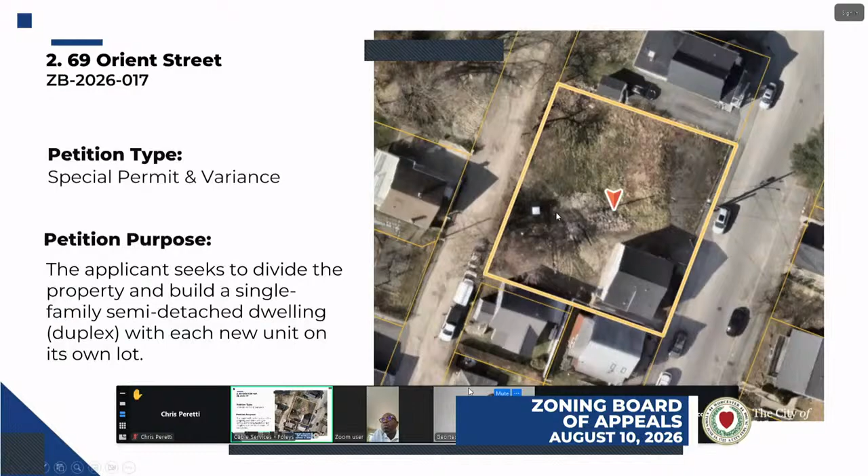Our petition asked for 3 pieces of relief for 69 Orient Street. The first was a variance for frontage, the second was a variance for area, and third, a special permit with regard to modification of the driveway and parking. I was advised by planning that there were 2 requests for waiver that we should also make orally regarding the lot percentage and the distance to adjacent buildings.

At this point, as you can see from the plans that we filed, right now there is a 1-2-family home that sits on the extreme left side of the lot if you look at it from Orient Street. The hope is that we will get relief to allow a division of this 11,000 square foot lot, which right now has 110 feet of frontage, and divide so that the current house lot will have 50 feet of frontage and 5,000 square feet, which we would need variances for the 1,000 square feet, and also 5 feet for the frontage, and that the other portions of the lot be split into 2 lots, each of 3,000 square feet, which would allow us to build a duplex, semi-detached, single-family home.

The existing lot right now does have 11,000 square feet in the frontage. Interestingly, if the building were not on the lot right now, we would actually have sufficient frontage and square footage to put 4 units on the lot if the building weren't there. That's sort of our topographic issue with the variance, that the house is there and it's on the extreme side of the lot.

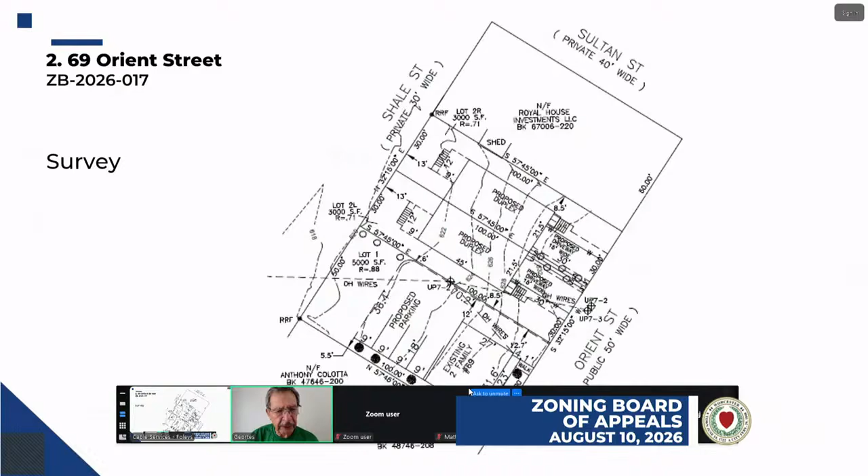Yes, I agree that this is a straightforward, good project, and the provision of housing, and actually I think it's an improvement for the neighborhood, the area, because that lot, the empty lot there, the way it is right now, is not a good look. So I do support the approval. Just a couple of questions.

Since the entrance, since you have steps, first of all let me ask, is it the intent to rent the units, or is it a plan to sell those houses, those two units, those two houses? They're going to, I think, both be sold as individual units, single-family home attachments. Did you hear that? So the intent is to build and sell?

Yes, it's a build to sell.

The reason I asked that is because looking at the steps, if there are individuals with disabilities looking to get into the house, they probably would have to use the garage to go in. If at the end of the garage there is an easy way to get into the apartments, otherwise it would not be accessible at all the way it is right now. But that would be up to the people who want to buy it, and if there are individuals with disability who wanted to buy, basically they would not have a chance. So that's just a point that I make. It's not that I have the purview to stop the project because of that.

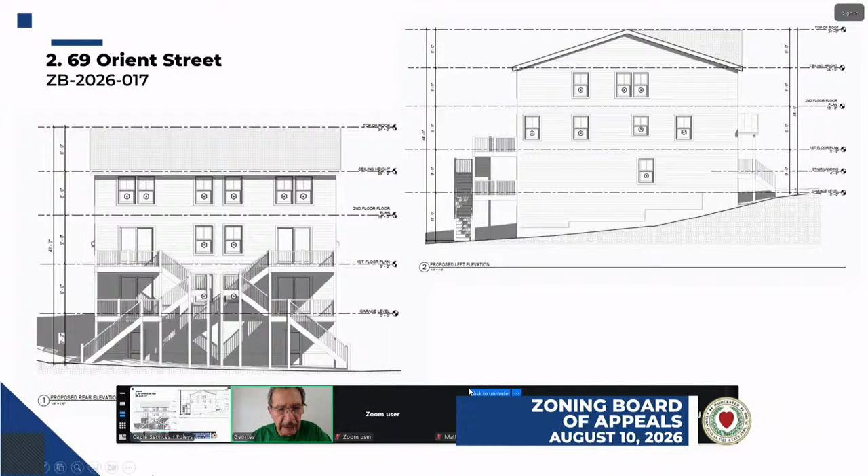You want to comment? So if you're speaking regarding the garage, you should have access from the garage to the unit, once you park the car into the garage. Okay, that would solve it. Thank you.

Let's move forward. I'm for the project, Mr. Chairman. Yes, and thank you for raising that, that's a really good point. I just want to echo that when possible, it's not a requirement, but we certainly look favorably when taking into consideration people's accessibility needs. So thank you, Board Member Cortez, for raising that.

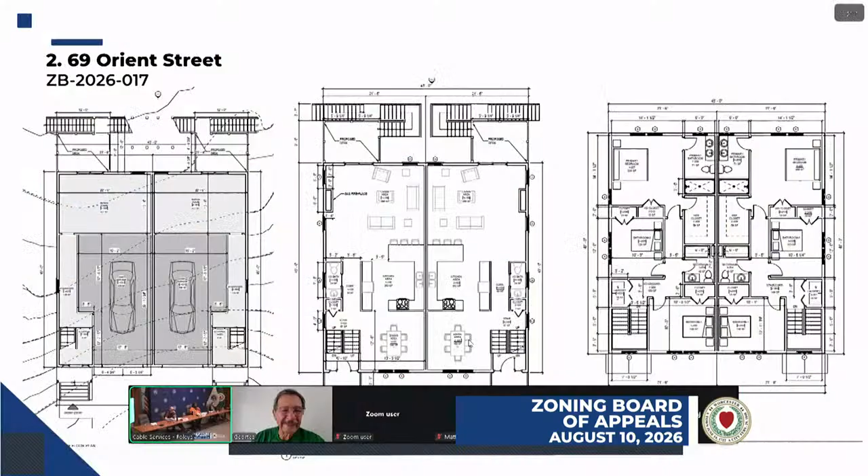Sure. Board Member Torcono. Sorry, technical difficulties. Board Member Torcono, when you get a chance. Eric, it looks like you're still muted if you're trying to unmute. Now you unmute me, I was put on mute by the host.

Go ahead, I have no comment. Board Member Sacco, any comment? Project, good chair, no additional comment.

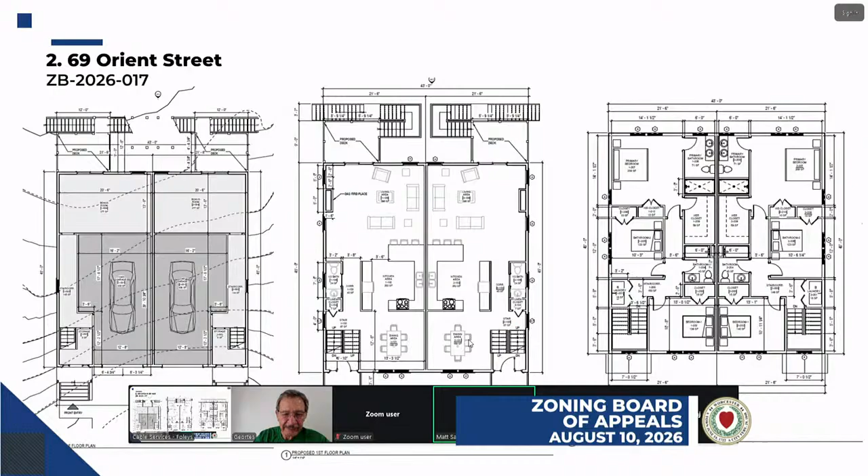Thanks. Okay, in that case, I will take a motion on 69 Orient Street. I'd like to make a motion to close on 69 Orient Street. Is there a second on the motion to close? Second. On the motion to close, Board Member Cortez, Yes. Board Member Maremi, Yes. Board Member Torcono, Yes. Board Member Barnhagen, Yes. My vote's yes.

Is there a motion on 69 Orient Street? I'd like to make a motion on 69 Orient Street for approval of variance for relief of 1,000 square feet from the 6,000 square foot minimum lot area requirements for a two-family dwelling in an RG5 zone. Approval of a variance for relief of 5 feet from the 55-foot minimum frontage requirements for a two-family dwelling in an RG5 zone, and approval of a special permit to modify the parking dimensional layout and/or landscaping requirements, loading requirements, and/or the number of required parking spaces, subject to the conditions as set out in the staff memo on page 6 of 9, and the waivers as requested by the applicant.

Is there a second? Second. On the motion, Board Member Cortez, Yes. Board Member Maremi, Yes. Board Member Torcono, Yes. Board Member Barnhagen, Yes. My vote's yes. Thank you very much for your time, appreciate it. Thank you. All right.

Next up is 6 Woburn Street. If the applicant could please come forward and state your name and city or town of residence, please.

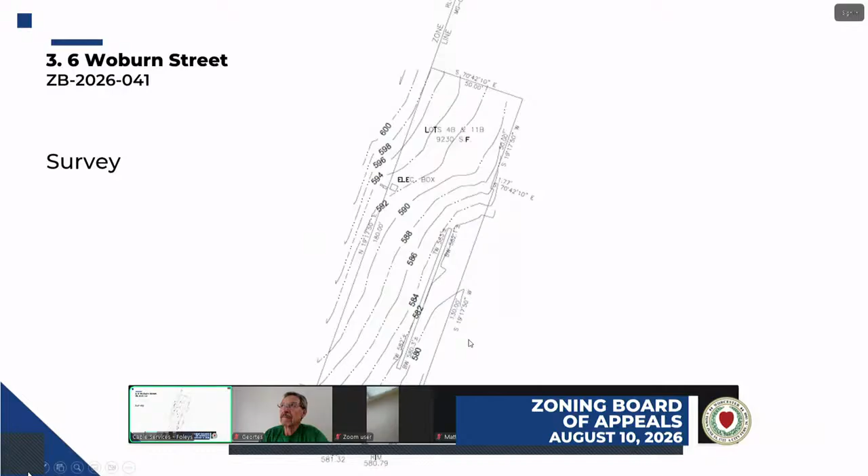So we had a conversation with the applicant about it. We think the nature and description of the project were adequate to provide notice. Ultimately it's the applicant's decision as to whether they wish to proceed — they indicated they did, but we wanted to put it on the record and have them confirm. The applicant confirmed: we would like to proceed, yes.

So the other forms of relief the applicant is seeking relate to the side yard setback for the west side. Because of the proximity to the residential zoning district, this takes the more conservative buffers for the residential district and applies them to the manufacturing structure, even though we're in a manufacturing zone, to provide some additional separation. There's a 20-foot setback requirement, and the applicant is proposing just shy of that, so they're seeking 0.2 feet of relief. They are also seeking a special permit with respect to the various parking layout requirements.

Along the west side of the driveway, the driveway is more or less along the property line, given the narrow shape of the lot. So staff have asked for screening in that location in the form of a fence, given the width. That width is variable, generally about a foot and a half, but in some places it reduces to about half a foot. The 5-foot setback is what's required for a driveway.

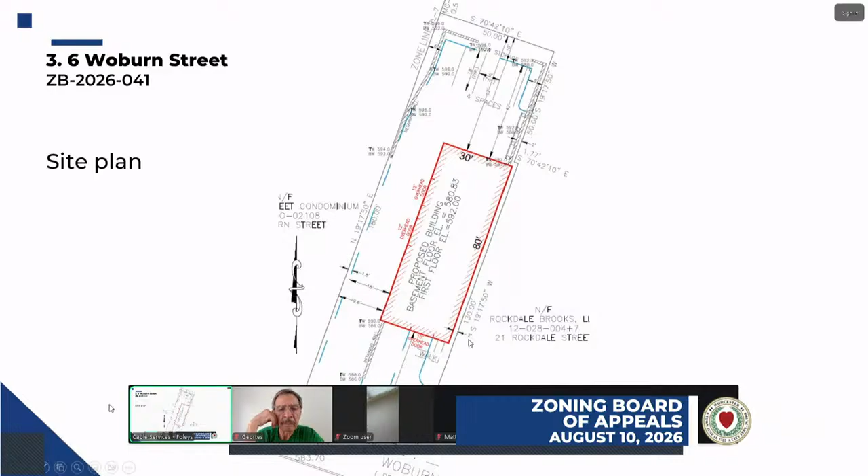There's also 2 shade trees required on the western side abutting the rear parking area, which the applicant can't provide given the wall's location, so they're seeking relief on that requirement too. Finally, the driveway is required to be 20 feet wide for 2-directional circulation, but they have an 18-foot wide driveway. So those are the various forms of relief they're in front of you for.

By-right options would be to build a smaller building. This is 4,800 square feet, relatively small already, so they'd have to reduce it further. They could also reconfigure the layout, most likely shifting the building to the back, but that would require substantial redesign given they're using the slope to their advantage for bi-level access to the structure. It could result in the parking being compliant in terms of setback and consolidating driveways, but these options would likely be challenging for the operational component of the building.

We had a number of questions that the applicant has responded to. We have all the comments conditioned adequately, and the applicant was amenable to those. They'll be in front of the planning board, given the slopes on the site, for site plan review, and due to the location in a managed growth area in the city.

This is north of Ararat Street, west of Rockdale. To the north is a mostly residential neighborhood, but along Rockdale and further east you have more manufacturing and commercial uses. This transitional area, based on the zoning district line we've been discussing, has affected the relief for the project. The applicant indicated they're planning to operate 8 to 5, Monday through Saturday, as potential hours—not that you're conditioning the special permit on that, just for context on how they're intending to operate.

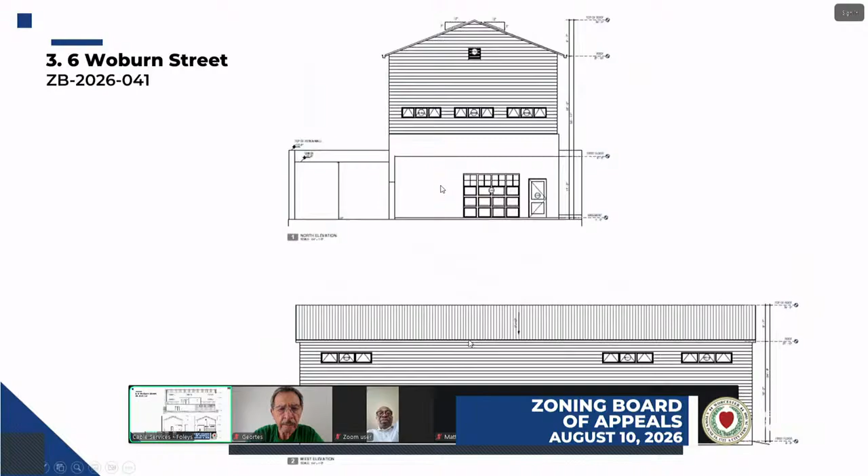Similarly, because of what he's building there, even though it's in the manufacturing district, because it's transitioning into the residential, he has special oversight. Some of the things you're concerned about, the slope, the look, making sure it actually functions, those are what we look at with the city staff, and the planning board will also look at those questions to make sure it looks like what he's proposing.

I had a question, what is going to be built there? It's a business for fire extinguishers. Fire extinguisher company - it might be the safest building in the city. Mr. Barreto's business, through the chair, is he just provides fire extinguishers to various businesses.

My question? Well, I want one at a time. I want to make sure I get his question. I'll get your question. It shows a driveway over there in the back. Through the chair, if you could just talk into the microphone. Oh, yeah, you got to talk into the microphone. Sorry, I thought it was loud enough.

So that driveway is in front of the building? Correct, yes. And what's behind it? The parking lot, the parking lot to the length of it. Just make sure you talk to me, please. And over here, there's the 3 buildings, right?

That's condominiums. So what are you going to do to retain that wall? What are you going to put there? You're looking at me like I'm talking from another world. You got to talk to me, please. How are we going to retain that wall? Well, I don't know, that's an interesting phrasing.

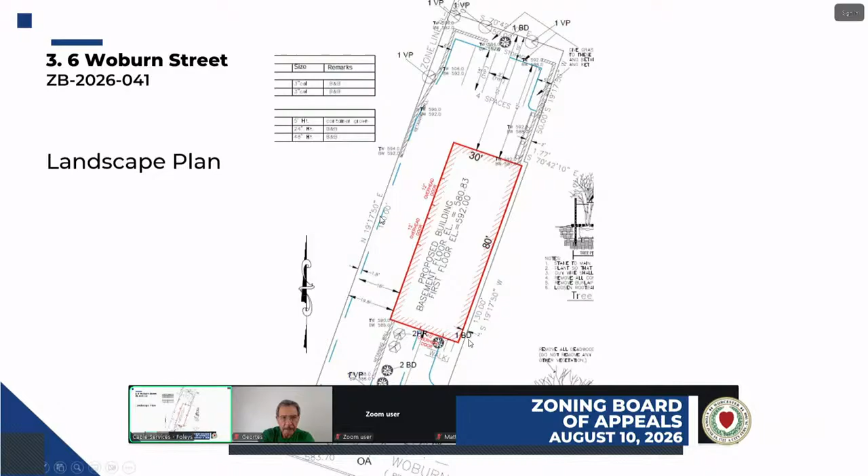Anybody else? Anybody online? Okay, so going to board comment, I'll say really quickly, this is a small request, literally in the point zeros, and I actually think this will be nice. I was out there, it looks like a fine thing, and as I joked, it'll be the safest building in the city of Worcester with fire extinguishers. So I'm happy to move it forward.

And you got all the other questions, board member. Voting on this is going to be board member Sacco as the alternate on this one. And with that, I'll go to the room first.

Board member Barthagen: Through the chair, I don't have too much to say. The requests for relief are minuscule here, so this is almost complying with every zoning rule we have, except just slightly off. So I tend to give the benefit of the doubt to those types of applications. Plus, I agree with the chair that this looks like a really good building. It'd be nice for you to have your business be closer to where you live.

I also feel a little bit unfortunate that this is right next to that condo building, but I think it's relatively minor in my mind. I think this is in the manufacturing district, and this would be a good use for that manufacturing acreage, so I have no problem with it.

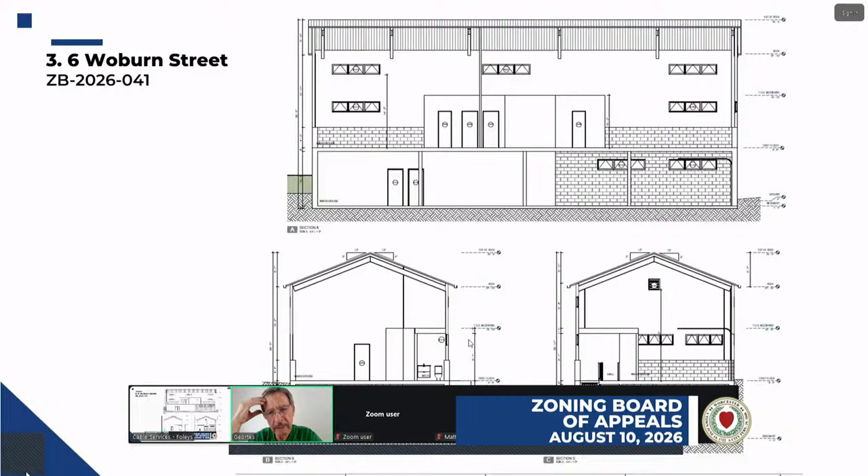Is that something just for light that goes through? Yes. Or is it another kind of level in there, like an attic or something for storage, or what is it? As you first guessed, it is just for light. It's because that's the south face of the building, to bring a little light in that won't otherwise be there.

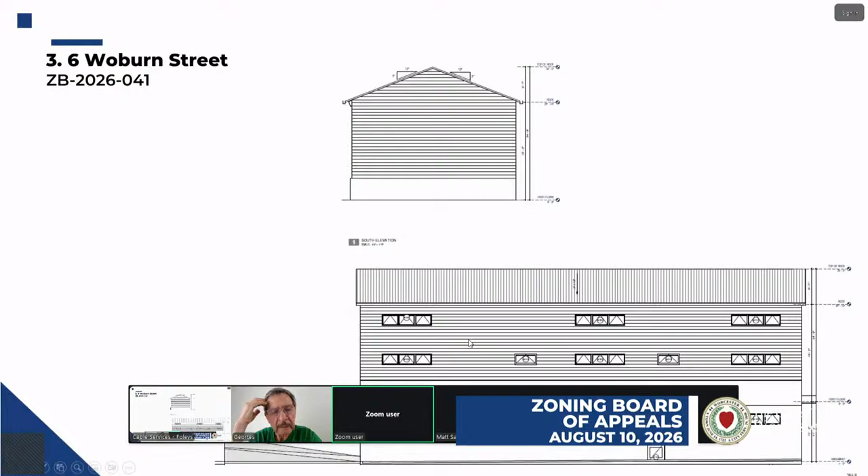Okay, thanks, other than that I'm for it. Board Member Torcono? No comment. Board Member Sacco? No comment. Thanks, okay.

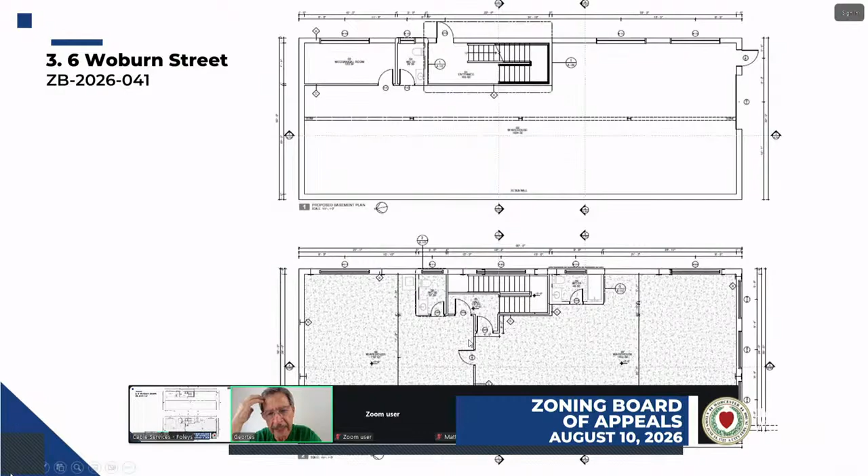Through the chair, yes, this is George Cortez again. I missed another question, and that's in regard to the retaining wall. That retaining wall should be low, no more than 4 feet, so is there a fence to be placed on top of that retaining wall? What is behind the retaining wall? Just for purposes of safety, I always ask about retaining walls, if there's going to be some type of fence on top.

To the chair, one of the other staff recommended comments was the installation of fencing, which in much of the case would be either on top of or immediately beside that retaining wall, or those retaining walls, I should say. Either way, so that's an option with the retaining wall. So that answers my question. Thank you, let's move forward.

So we will need, Board Member Cortez, we'll need you to second on these motions upcoming. So on that, I will entertain a motion to close. I'd like to make a motion to close for 6 Woburn Street. So moved. Is there a second? I do second the motion.

On the motion to close: Board Member Cortez? Yes. Board Member Moremi? Yes. Board Member Torcono? Yes. Board Member Sacco? Yes. My vote's yes. Is there a motion on 6 Woburn Street?

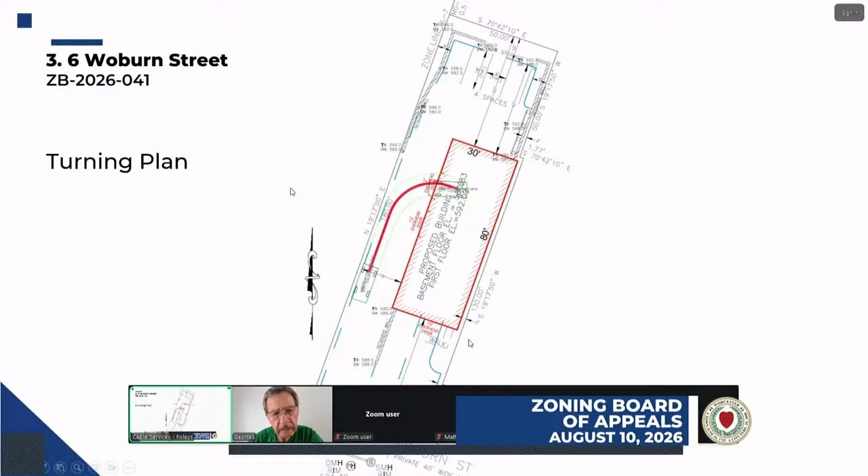I'd like to make a motion on 6 Woburn Street for approval of a variance for relief of 0.2 feet from the 20-foot minimum side yard setback requirement for a non-residential use in an MG 0.5 zone. Approval of a variance for relief of 0.02 from the 0.5 to 1 maximum dimensional floor to area ratio in the MG 0.5 zone. A variance for relief of 0.27 from the 0.25 to 1 maximum dimensional floor to area ratio in an MG 0.5 zone. And for approval of a special permit to modify the parking dimensional layout and/or landscaping requirements, loading requirements, and/or the number of required parking spaces, subject to the conditions set forth in the staff memo on page 6 of 10, and the waivers requested by the applicant.

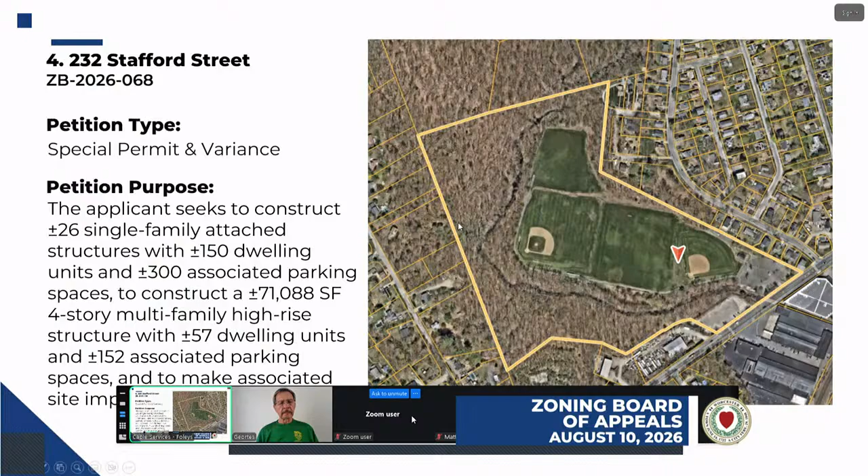For the record, Mark Bornstein. I'm an attorney here in Worcester at Prince LaBelle, representing the applicant. Before you this evening, our application is in connection with a residential community at 232 Stafford Street for variances for relief for the maximum height and also for frontage, and also a special permit to modify parking layout requirements. We have a short video presentation for you. After that, we'll turn it over to staff, and to the extent needed, I'll introduce other members of the team that will speak to any questions the board may have. So we'll do the video.

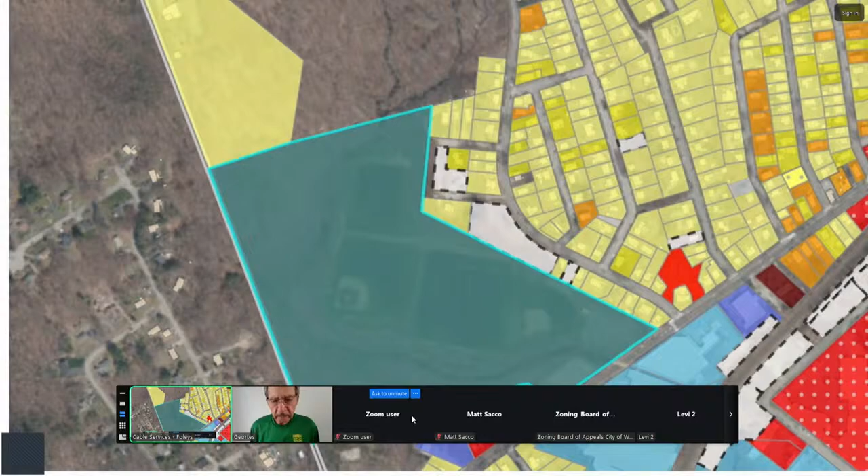The property is bordered by established single-family homes along Ludlow Street to the east, commercial development along Stafford Street to the south, residential neighborhoods in the town of Leicester to the west, and the Greater Worcester Land Trust Kettle Brook Conservation Area and trail network to the north. A defining feature of the site is Kettle Brook, a perennial stream that runs through the property, placing portions of the site within the floodplain. Together with the site's varied topography, these natural features create constraints which have guided the project's design from the very beginning.

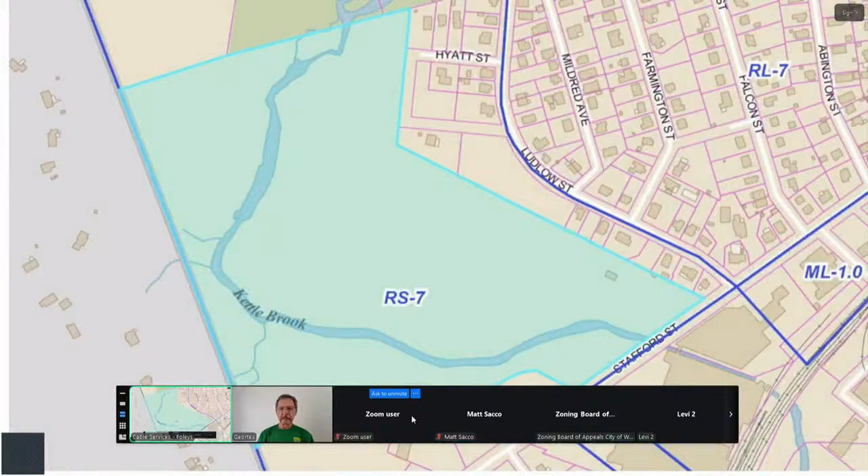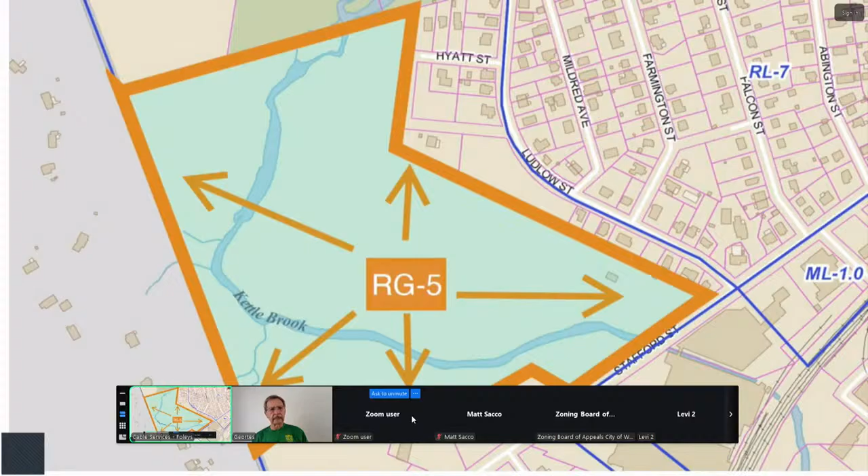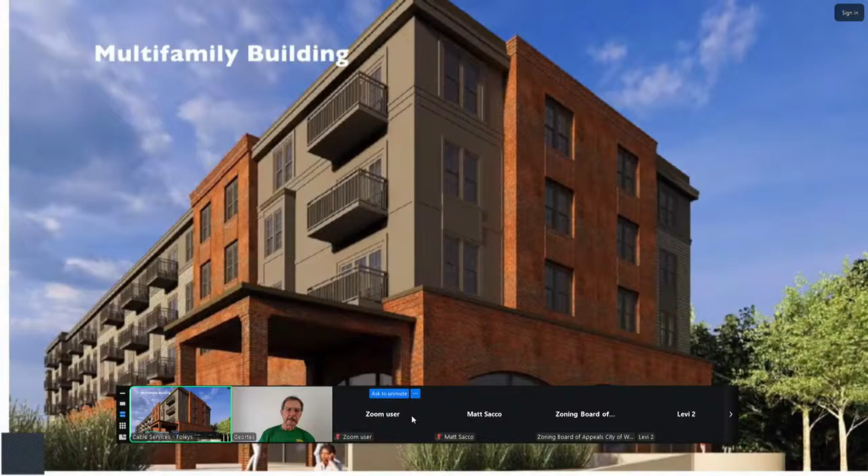In February 2026, the Worcester City Council rezoned the property to the Residence General RG5 zoning district to facilitate residential development at the property. The proposed project has been designed to implement that vision while respecting the site's natural resources and the surrounding neighborhood. The project will create a residential community with a total of 207 residential units. It includes a 4-story multifamily building containing approximately 57 apartments and surface parking with approximately 152 spaces. The project will also include 150 townhome rental units located within 26 single-family attached buildings.

Variations in exterior wall materials, depth, and detailing will provide a rich texture and break down the scale of the proposed buildings. Each townhome includes an attached garage and private driveway parking. In total, the development will provide 452 parking spaces, satisfying the city's off-street parking requirements and ensuring ample parking for residents and visitors. The layout of the project has been carefully planned to place the majority of the development away from Kettle Brook and the floodplain while preserving substantial open space and existing wooded areas along the western portion of the property. Those preserved areas will continue to provide natural habitat, protect water resources, and create a vegetative buffer between the residential development and the surrounding properties.

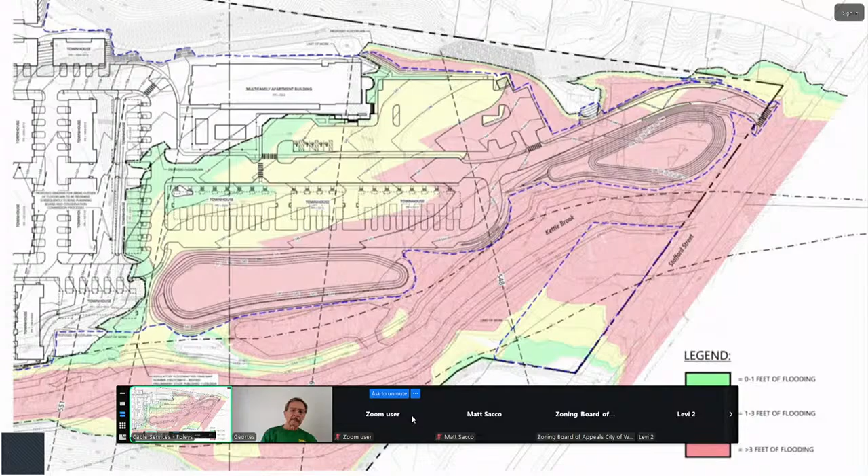The residential community is organized around an interconnected internal driveway system. There will be a primary driveway off of Stafford Street to the south and an emergency access driveway off of Hyatt Street to the north. The internal roadway network has been designed to provide safe and efficient circulation for residents, visitors, service vehicles, and emergency responders. For example, the primary entrance is located in an elevated portion of the site, and the emergency access driveway is located entirely outside of the floodplain. Furthermore, a comprehensive traffic analysis concluded that the surrounding roadway network can safely accommodate the projected traffic generated by the development without creating significant congestion or adverse impacts to nearby intersections.

The project also includes landscaped open spaces, amenity space along Stafford Street, pedestrian walkways, bicycle parking, stormwater management facilities, and extensive new landscaping throughout the site.

New trees and plantings have been selected for their long-term sustainability and resilience, with all tree species being Asian longhorn beetle and emerald ash borer resistant.

The project will require relief from the drive aisle width, frontage, and building height requirements. Certain drive aisles will be as narrow as 20 feet, requiring 4 feet of relief through the requested special permit.

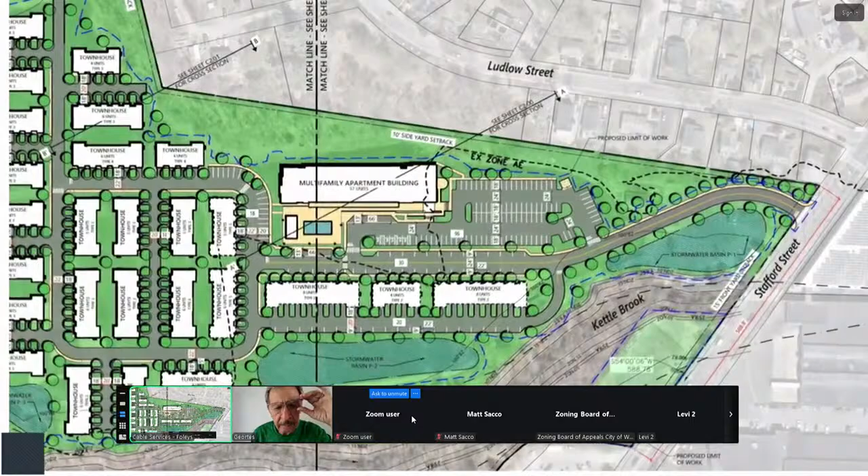The 150 townhouse units would generally require 3,000 feet of frontage, while the property has approximately 588.8 feet of frontage along Stafford Street. The project therefore requires approximately 2,411 feet of frontage relief through a variance.

Certain townhouse buildings will be elevated above the floodplain, resulting in additional height, while other buildings are designed to follow the property's natural topography and minimize grading. These townhouse buildings that exceed the maximum height requirements will require relief through a variance.

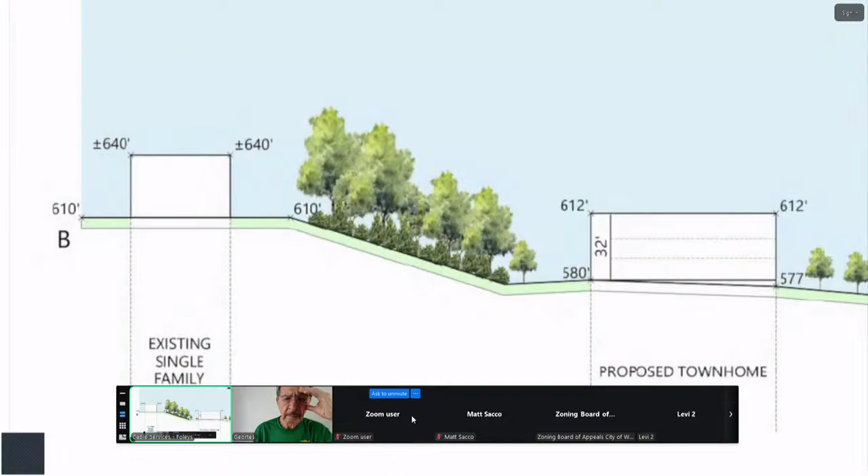Importantly, though, these buildings will be set below and away from the existing Ludlow Street homes. Moreover, the tallest structure, the multifamily building, will comply with the RG5 maximum height requirement and will also be set below and away from the existing homes.

Overall, the proposed development reflects a balanced and thoughtful approach to residential growth. By responding to the property's unique natural features, preserving substantial open space, and providing a diverse mix of housing opportunities, the project creates a well-designed neighborhood that complements the surrounding community while helping to meet Worcester's growing need for housing.

Thanks, Amy Beth. Mr. Chair, if I may, just a couple additional points. Yep, if you could just talk into the microphone a little bit more. Yes, certainly. Is this good? Can you hear him? Barely. Okay, I'm going to try not to shout, but I'll try to be as clear and as loud as I can.

Just a couple additional pieces of information to supplement the video presentation. As the team has been refining the floor plans for the multifamily building, they've decided to modify it such that there will be 59 units instead of 57 units. So we're now proposing 209 units total versus 207 units, which are reflected in the findings we submitted to staff. I just wanted to make that clear for the public, staff, and the board.

In addition, I'd like to talk through some of the ongoing processes that have taken place, and I'm sure staff will also comment. Once we submitted the applications, we received initial feedback from the fire department and emergency management with respect to the floodplain, and they asked for certain modifications. We had previously proposed an additional emergency exit off of Stafford Street, not off of Hyatt Street. The fire department determined they would like a second means of access from Hyatt Street, so we've added that to the plan.

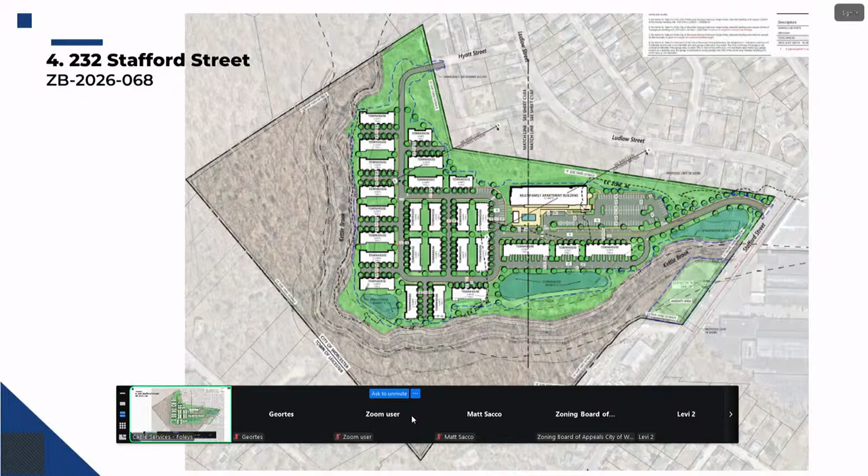Okay, so just to clarify, you're requesting the waivers? Yes, sir. Okay, and I want to make sure I heard that correctly — that by right, if they did multifamily units, keeping in mind other things that might come into play with the planning division and other pieces, they could essentially do 2,100 units through multifamily, and they're proposing 209. Correct.

Okay, and with that, I'm sure there's extensive public comment, so I'll ask that people state their name and city or town of residence and address all comments to me directly. Please come forward. I'll also note that we have written public comment that came in today — for board members, there is written comment in your packets. And for voting on this one, board member Barton Hagan will be the alternate. Okay, state your name, city, town of residence please.

Fred Nathan, Worcester. First of all, I have no horse in this game, but as a lifetime Worcester resident, Mr. Chair, I just want to make a couple of points. Worcester Academy has owned this property for 16 years. I think they're actually getting a pretty good deal as developers, paying $4.5 million for 36.7 acres of basically open land. My question would be — and it doesn't really pertain here, but I'm just curious — all these years it's probably been tax exempt, which will now become taxable property. And let's face it, Worcester needs housing.

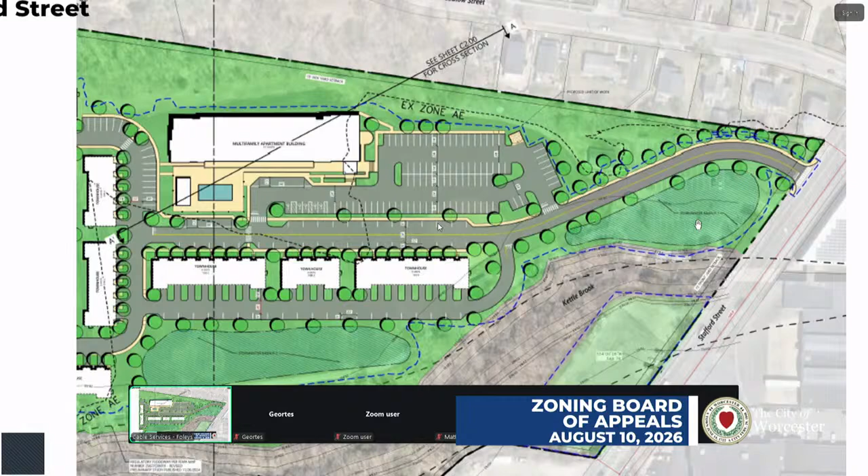Further up, there's the intersection of Ludlow Street, that shows a count of around 9,300 cars. And lastly, which is not shown, further up, the intersection of Stafford Street and James Street, it shows 12,300.

And it's important to recognize the area because it's very congested, as such. And those traffic counts, to give you a feel, up on the other artery, a count around Route 9 is 15,200. So when I'm talking about 12,300, that's a lot of cars, in very simple language, okay?

Before you come down to the opening, on the west side, you're coming down an incline about 10% slope, average, that has a name, Dead Horse Hill. And I'll let you use your logic, so that the dead horse was the horses died going up the hill.

So there is currently a very strong problem with just traffic. It's a nightmare to get out there during peak travel hours, particularly in the morning, and that becomes aggravated when there's inclement weather, like winter, whatever.

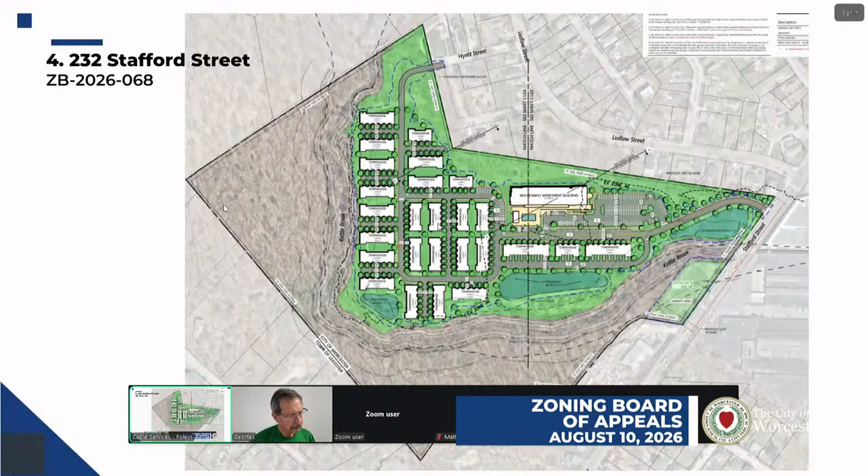I'd like to make a motion for 232 Stafford Street for approval of a variance for relief of 2,411.2 feet from the 3,000-foot minimum frontage requirement for a single-family attached dwelling in an RG5 zone, approval of a variance for relief of 10 feet from the 35-foot maximum height requirement for a single-family attached dwelling in an RG5 zone, and approval of a special permit to modify the parking dimensional layout and/or landscaping requirements, loading requirements, and/or the number of required parking spaces, subject to the conditions of approval set out in the staff memo on pages 7 to 8, with amendments to 1D for the removal of 5 and the amendment to 7, and the waivers as requested by the applicant.

Is there a second? Second. On the motion: Board Member Cortez? Yes. Board Member Moremi? Yes. Board Member Torcono? Yes. Board Member Barnhagen? Yes. And my vote's yes. Thank you very much. Thank you.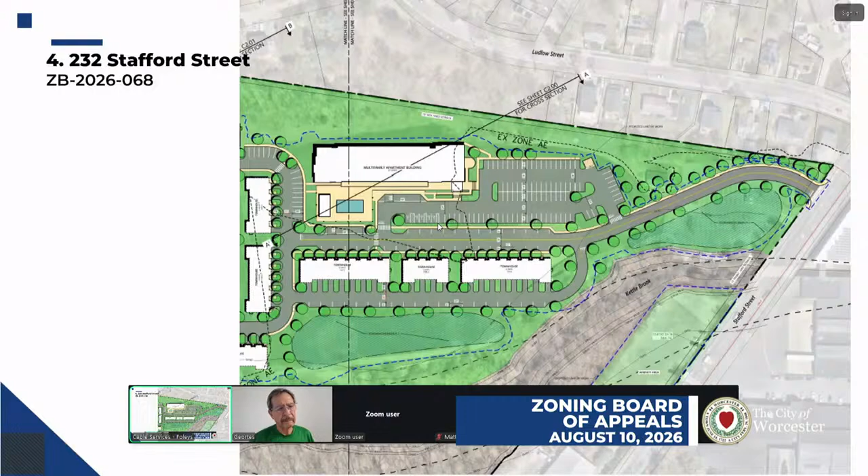So, Mr. Buteau, I want to say you have a really thoughtful letter here, and a lot of the questions you have still need to be answered by the planning board and a traffic study. Please get the contact info for the planning division, because we can't answer your questions, but they should get answered. I just wanted to thank you for your thoughtfulness. Does that make sense? So please get the card for the planning division, and get information from them on how to contact them further.

Okay, thank you. Next up is 79 Pullman Street.

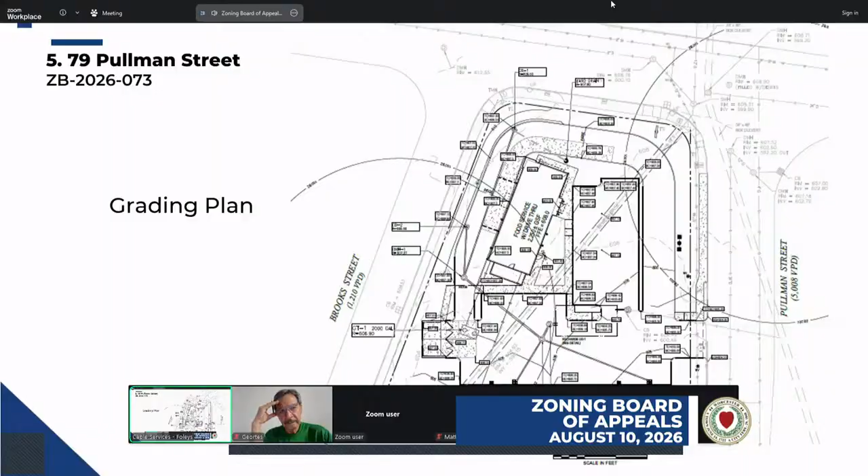Some of you may recall me being here a couple of years ago, and we had proposed a similar site plan. That tenant was going to be a Chipotle. Building's about the same size, parking lot's about the same size. The difference is that Chipotle is a pickup-only drive lane, where this would be a full-service traditional drive-through. We've modified the site from that approved plan slightly. We've moved the drive-through lanes to the far east side of the site. It allowed us to get a little additional length for the queue, and also separate the parking so there was no conflict with the escape lane.

Along with the building here, we'd be proposing - we originally proposed a 29 space parking lot, similar to the Chipotle. As you'll hear during staff comments, there's a request to redesignate what we had considered the front yard. In the zoning code, when you have frontage along more than one street, one side becomes the front yard and the other 2 become side yards. In doing so, 2 parking spaces would be in the front yard. We've conferred with the client, and they say they can operate effectively with the 27 parking spaces.

We've provided a traffic report that addresses the queue. That traffic report was done using ITE-generated trip rates. What we found is the general consensus for fast food with drive-through generates a little bit more traffic than a traditional Taco Bell. We've provided in the traffic report sales data for another Taco Bell restaurant in Worcester operated by the same applicant. It basically says that Taco Bell is about roughly 70 or 80% of what the ITE trip generation would generate. They also provided some data on the types of transactions.

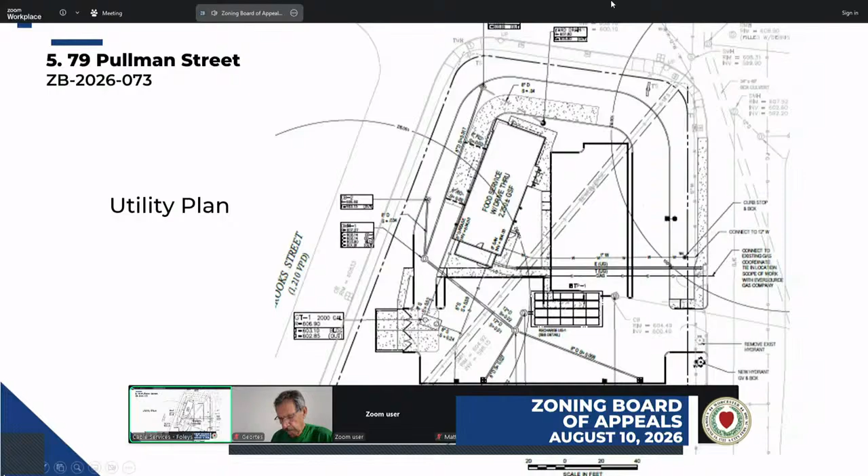So the project requires 27 parking spaces, and the applicant has proposed 29, 2 of which would be ADA and 6 of which will be EV ready. So the applicant's surplus of 2 spaces - again, it was confirmed with inspectional services that Pullman Street would be considered the frontage for the building, and so therefore these 2 first spaces would be considered in the front yard, so they should be removed. As stated, the applicant has agreed to do so.

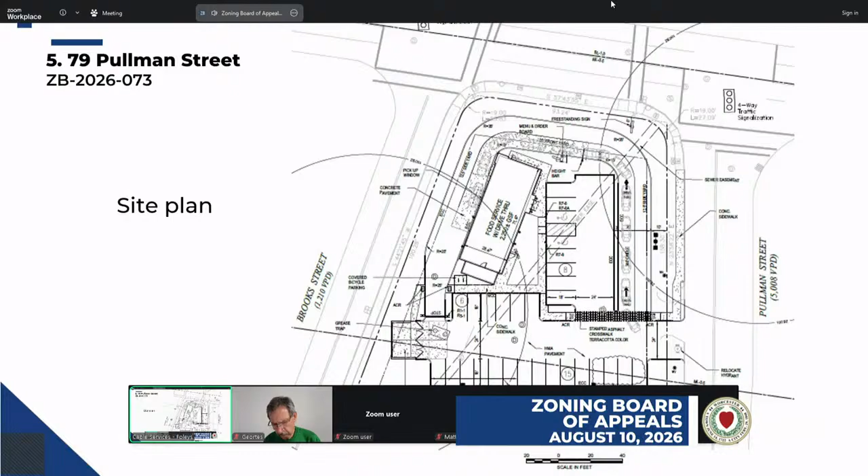Trees are required every 25 feet on center along the perimeter, and the applicant has provided a landscape plan which does show trees around the perimeter. It does seem that one tree is missing from the entry area. The traffic study does indicate that it is recommended that the tree not be planted there for sightline reasons, so that would be an additional piece of relief under the parking, loading, landscaping special permit.

So we can add that to the special permit if the applicant wants to confirm that piece. We're also looking for the applicant to clarify what materials are proposed for the island separating the drive-through and the northern parking lot. Staff would ideally like to see a landscaped island separating the drive-through aisle from the parking area, to prevent cars from cutting across from the entrance into the parking area.

Also, because of the size of the parking lot, staff is recommending providing 25% compact spaces, which the applicant has explained is not amenable. So staff, that was our request because of the size of the parking lot. If that's stricken, that is fine with us.

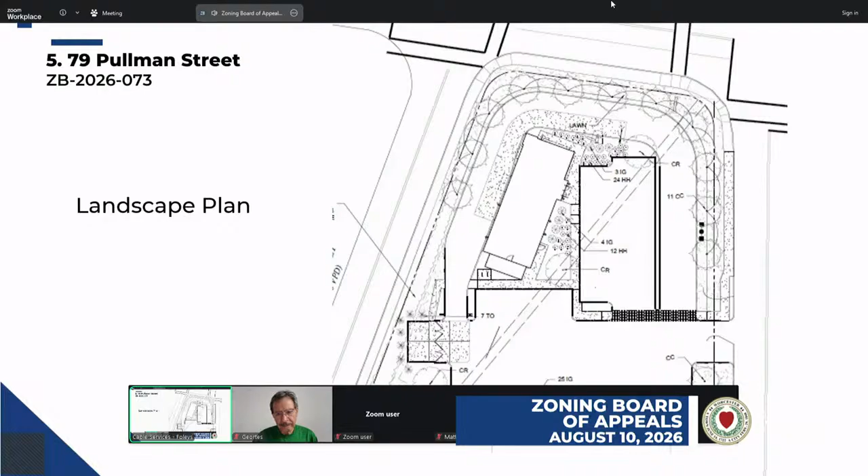So I have a question to city staff. For 3A, it sounds like if they don't provide it between now, they would just need to provide it before the planning board. Is that correct, to be satisfied? Yeah, it's just for review, so DTM can review.

Okay. Well, there's no one here, I believe, for this. Is anybody online for 79 Pullman Street? I'm going to guess no.

I'm happy to move this forward. I think this is pretty straightforward. I am okay cutting 1A, 1H, and 1I. For 3A, the parking item, since you verbally told us, if you just write it down, I think that suffices. Sure, okay, since you verbally gave it to us. So those are all the conditions.

So I'm happy to move this forward. Board member, we'll go in person here and then we'll go online. So online folks, and voting is Board member Sacco.

Board member Barhagen, through the chair: I'm fine moving this forward too. I think it's pretty straightforward, and I'm fine with removing A and H. I just have a question about I.

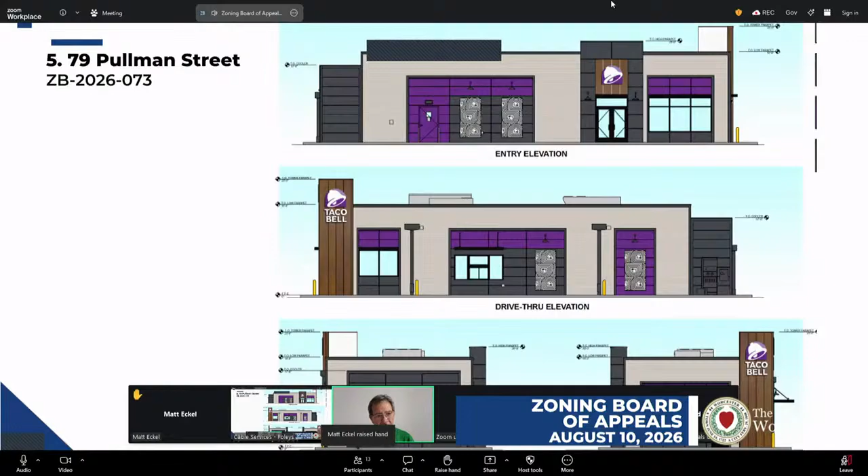Change the screen. Extension of time. Good evening. Yes, go ahead, we can hear you. Great. Good evening, Mr. Chair, members of the board. For the record, my name is Matt Eckel. I am an attorney with Fletcher Tilton on behalf of the applicant. For the record, I reside in Burlington, Massachusetts.

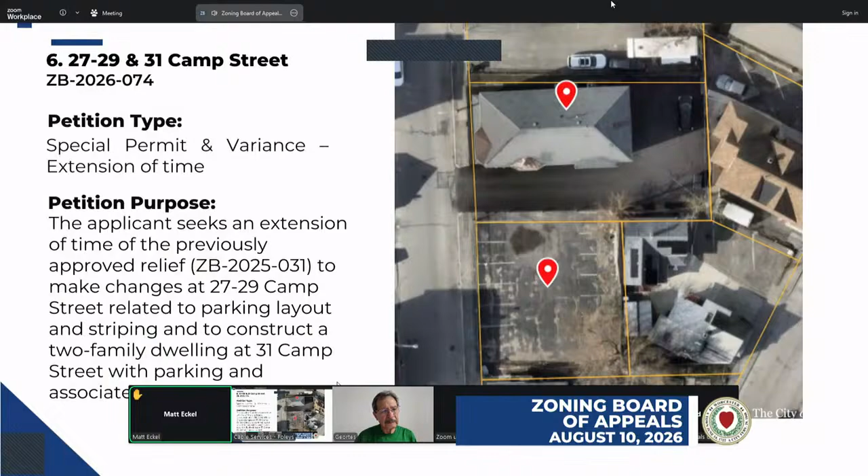We're here tonight to respectfully request a 6-month extension in connection to the special permit and variances previously granted by this board back on June 23rd of last year, relating to the proposed project at 31 Camp Street as well as 27-29 Camp Street. By way of very brief background, I know it's been a long night already, so I'll be brief. The applicant received an approval from this board for a new 2-family building at 31 Camp Street, along with parking and site improvements.

For this portion of the project, the applicant received variances from the board relating to the lot area, frontage, and height of the proposed building. The companion case, which was filed under 27-29 Camp Street, also received relief, despite no changes actually being proposed to that portion of the lot. However, since they had been considered merged for zoning, we did need to seek relief for that portion of the lot as well. Specifically, we received relief in the form of a variance for lot area and a special permit relating to the parking setback requirements and drive aisles with parking and loading requirements.

The applicant still remains committed to commencing this project as soon as possible and bringing much needed residential housing units to the city. Currently, no changes are proposed to the previously approved project. We just need a little bit more time, and therefore we are respectfully requesting your approval for a 6-month extension. With that, I'll happily pause and take any questions you may have.

Through the chair, Amy Beth Lath for the Planning Division. Everything the applicant said.

I'll just note one point of clarification, and I'll look to my colleague, Ms. Smith, to confirm. The variances can have a 6-month extension. I'm fairly certain the special permit can get a year. Also, special permits can be administratively approved for an extension through inspectional services in the future, if that needs to happen.

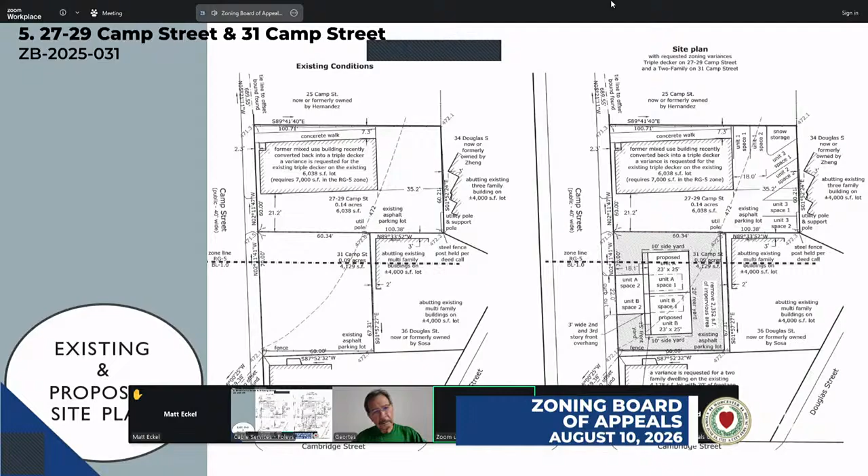I'd like to make a motion to close on 27, 29, and 31 Camp Street. Is there a second? Second. On the motion to close: Board Member Cortez, yes. Board Member Maremi, yes. Board Member Trocono, yes. Board Member Bart Hagan, yes. My vote's yes.

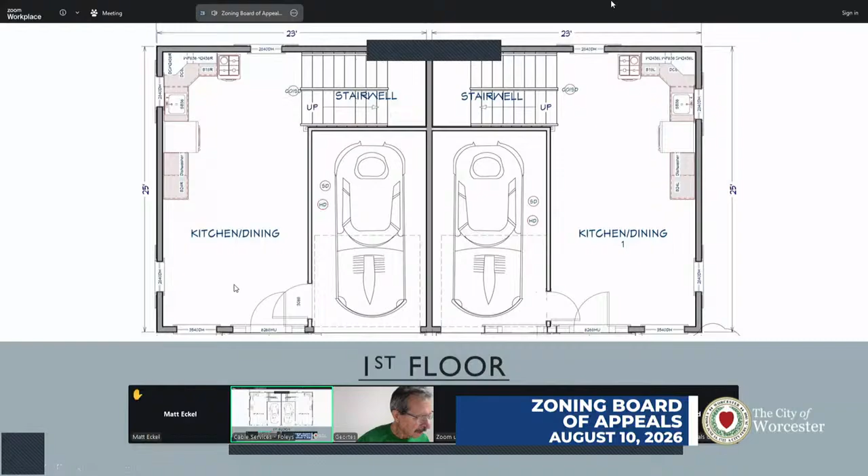Is there a motion? I'd like to make a motion for 27 to 29 and 31 Camp Street for an extension of time. The extension for the variance would be extended to January 15th, 2027, and the extension of the previously approved special permit would be through July 15th, 2027.

Is there a second? Second. On the motion: Board Member Cortez, yes. Board Member Maremi, yes. Board Member Trocono, yes. Board Member Bart Hagan, yes. My vote's yes. All right, thank you very much.

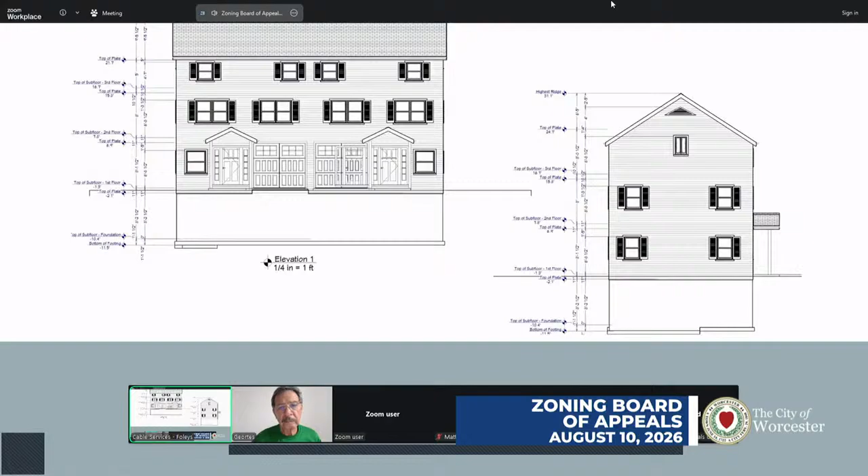Next up is 30 LaGrange Street. Good evening, Mr. Chairman, members of the board. For the record, my name is Donald O'Neill. I'm a lawyer here in Worcester, appearing this evening on behalf of Worcester OZ Fund 2 LLC.

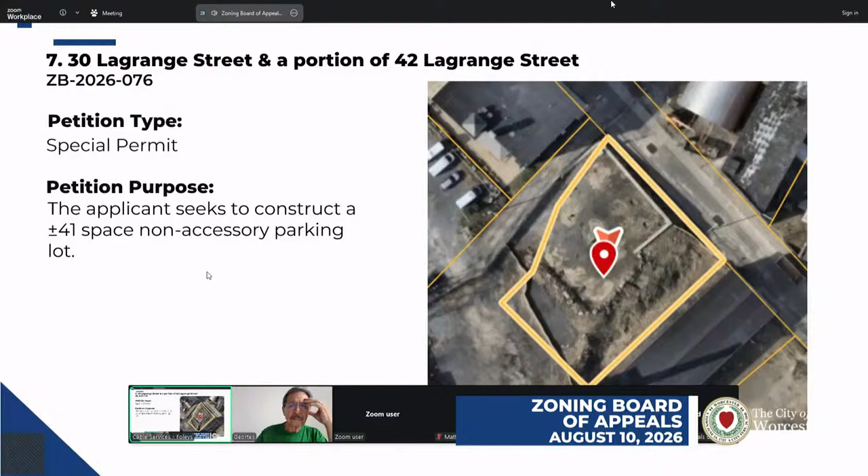This is a request we filed to allow for the expansion or alteration of a pre-existing non-conforming parking use. This use is allowed in the underlying zone; however, because it is also in the CCOD overlay district, it does not allow for non-accessory parking. The property itself has a history going back over 30 years of being used for parking for parcels, in this case primarily for something on the other side of LaGrange Street.

What we're looking to do is utilize this parking. My clients are also involved in the property at 98 Beacon Street, a former industrial mill building approved for up to 58 apartments. The parking that goes with that parcel is 8 to 10 spaces. Although there's no parking requirement in the CCOD overlay district, there's still a need for parking for tenants. Because the property is not directly across the street, but pretty close, there's no ability to combine them—they would have to be on the same side of the street and adjacent to each other to be considered accessory parking, which would be permitted.

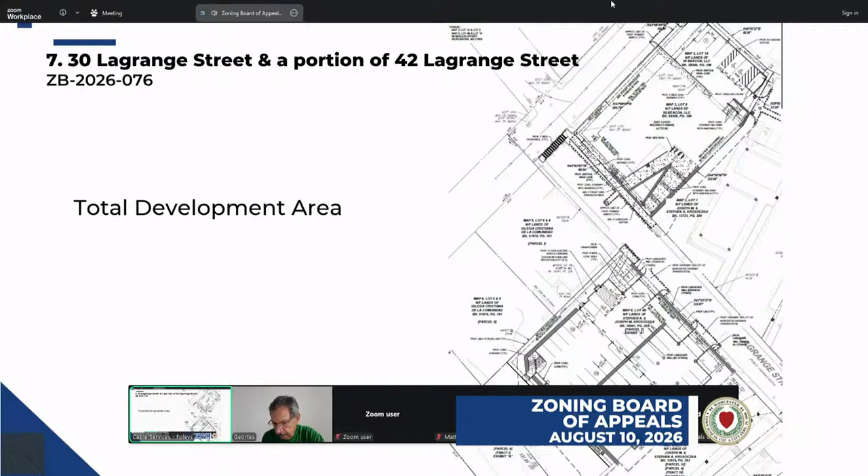So if you look at or drove by the site or looked at any of the aerial imagery and documentation provided, you can see there's a lengthy history of the property being used for parking of vehicles, most recently in association with a property across the street in a Quonset hut area that was an auto body shop, and they were parking cars over here.

So the applicant provided an attested statement from the prior owner about the history of the use of that for the last 30 years or so, indicating that they had not a lease, but an informal arrangement where someone was using that property for parking.

So they are looking to reconstruct, demolish all of that, and build something much larger but in more modern form than the regrinds and gravel and spots of pavement that are out there today if you went by. So what we have, as Attorney O'Neill mentioned, is a plan that is likely to change based on the nature of what the site was at the time this proposal was put forward.

You can see there are stairwells that interconnect with the adjacent lots. Don't believe that those are likely to be proposed any longer. There's a transformer. I'm not sure if the transformer will still be necessary.

Some of our comments really regurgitated for the most part the comments we'd previously issued on this concept, and pulled those forward as conditions that you have here. Essentially, the applicant will either be back in front of you for an amendment to this and possibly additional relief if they can't comply with those requirements, because they reconfigured the lots to create this on its own lot, and in doing that, there are likely some issues with the setbacks for the parking area that they've created. The plans don't expressly clearly show that on a survey that has been provided.

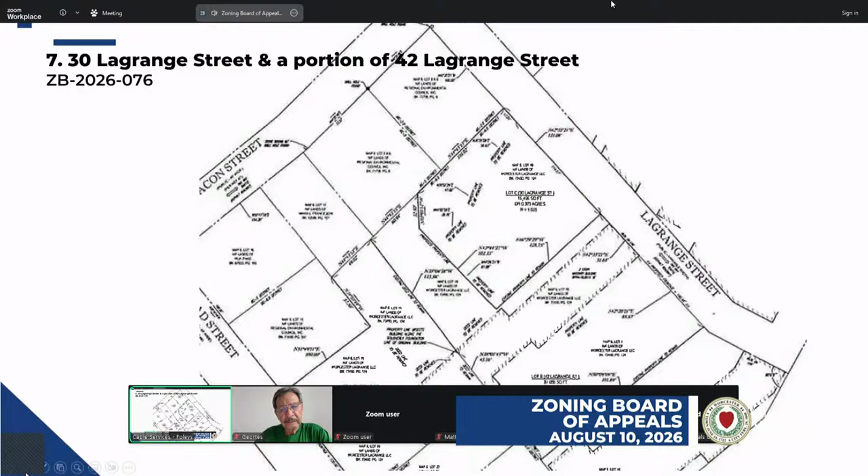But really the applicant's here to have you consider the existing use, its privilege, and hopefully see that this, what they're proposing, is an upgrade from what is there and has historically been there, as this neighborhood continues to transform and change away from relic manufacturing uses and move forward into housing and hopefully a continued vibrant neighborhood.

So I can go into more detail, but basically 41 spaces is what's shown on the plan that you have had the opportunity to review. And the applicant does have a zone change pending, a sort of plan B, if you will, for the board not to grant this. That went in front of the planning board, was not favorably recommended, and was sent back to city council for economic development committee. So just a little context on other moving pieces to facilitate this project. We were able to identify this as a potential pathway with a shorter timeline, and the applicant has, as you're seeing this evening, pursued that.

So I don't need to go over any of the comments that I have. I think the applicant's agreeable to all the conditions. This is an area, contextually for Now Next, that is sort of at the transitional fringe of a managed growth area and a transformational growth area, an artisan growth area associated with those mill buildings. It didn't include this side of the street, and then the infill corridor of Main Street, all very walkable to transit.

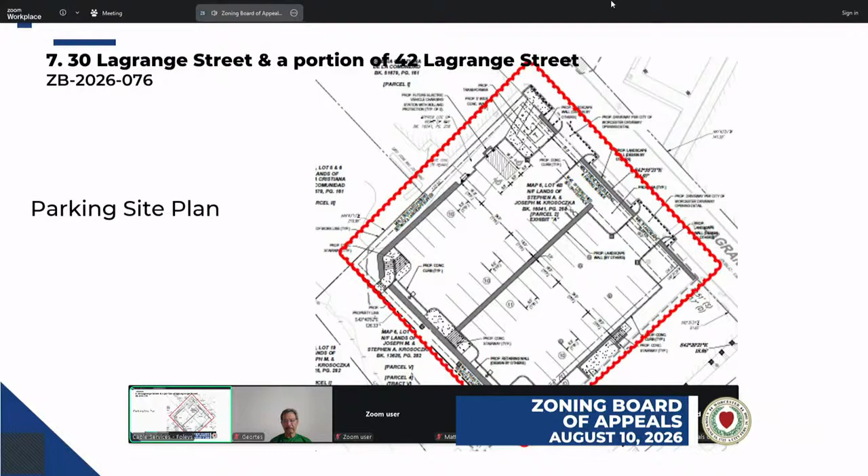Happy to answer any questions. Thank you. Is anybody here for 30 LaGrange? Anybody online? All this to keep a parking lot. I'm happy to move this forward.

Board member, so voting on this, it will be board member... wait, who just voted? Board member Sacco. But we'll start in the room. Board member Bart Hagan? Yeah, I don't have any additional comments to make. No. Board member Maremi? No other comments. Board member Cortez? Moving through, no comments. Board member Torcono? I'm good, no comment. Board member Sacco? No comment. All right, I'll take a motion to close.

I'd like to make a motion to close on 30 LaGrange Street and a portion of 42 LaGrange Street. So moved. Is there a second? Second. On the motion, board member Cortez? Yes. Board member Maremi? Yes. Board member Torcono? Yes. Board member Sacco? Yes. My vote's yes. Is there a motion on 30 LaGrange Street?

I'd like to make a motion on 30 LaGrange Street and a portion of 42 LaGrange Street for approval of a special permit to extend, alter, or change a privileged pre-existing non-conforming structure and/or use, subject to the conditions of approval set forth on pages 4 to 5 of the staff memo, and the waiver requested by the applicant. So moved. Is there a second? I do second the motion. On the motion, board member Cortez? Yes. Board member Maremi? Yes. Board member Torcono? Yes. Board member Sacco? Yes. My vote's yes. Thank you very much.